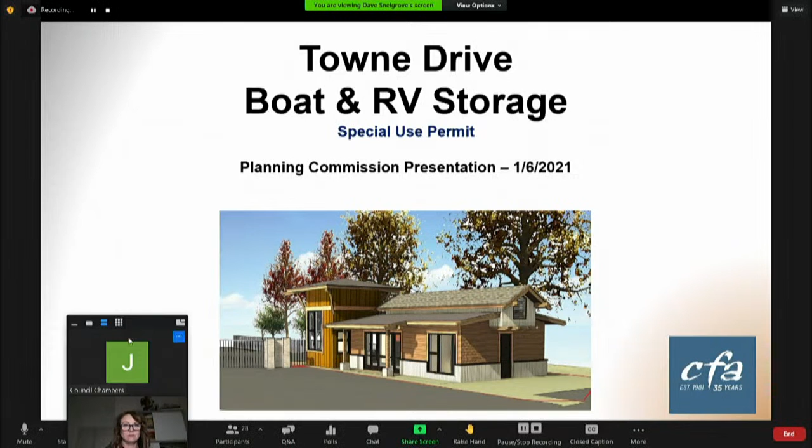Thank you very much. With me on the line tonight, Mr. Phil Busick, who's the project applicant, and Kathleen Knight, who's our civil engineer on the project, should be on as well if we have any questions for her relative to some of the engineering. And let me get over to that screen. Come on, there we go.

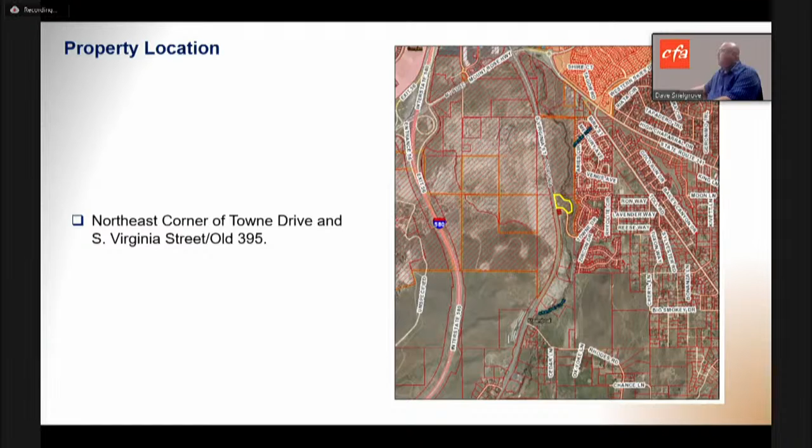So the property location is at the northeast corner of Towne Drive and South Virginia Street, Old 395. We abut the old highway on the western side, and on the eastern side of the site is Steamboat Creek. The existing site conditions, the site's relatively flat, with a gentle grade that goes down towards Steamboat Creek the farther east you go.

On the site, there's an existing billboard. That billboard is conditioned and required to be removed with the construction of the project. We also have an H-frame power line, an NV Energy power line, that cuts across the bottom part of the property, running from northwest to southeast.

We have been in conversation with Chris Robinson over at NV Energy relative to the transmission use agreement, which will have to be done prior to us constructing and actually operating this. These line heights are really high, in the order of 45 to 55 feet, so we shouldn't have any conflict with power lines. We just have to get the appropriate easement and agreement set up to construct and then to operate below those.

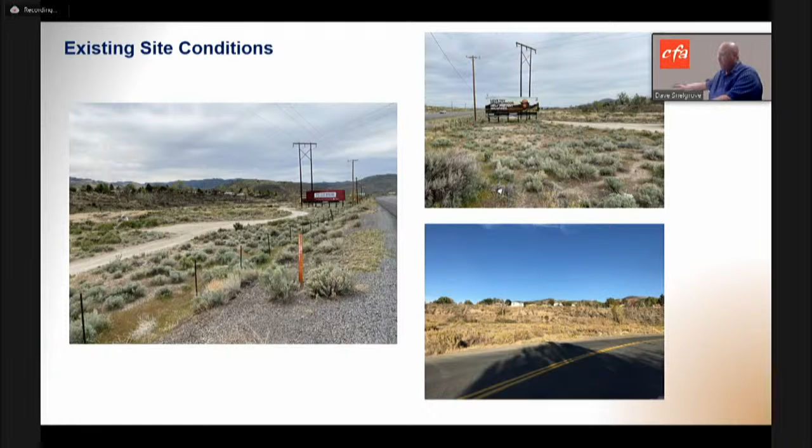This is the site over time, and Phil's owned it for a couple of years now. It's been used off and on as a dumping ground. The picture on the left and the picture on the bottom of the screen are two that I found just recently that hadn't been out there before. I put this picture in on the top right-hand corner.

This pile of rocks had to be put there by Phil as a blockade. There's a gravel area just south of our site that Phil also owns. Somebody had dropped a dilapidated motorhome there, and it became Phil's problem. At about $2,500 later to get that removed, and a code enforcement issue on him, he got wise and said, okay, I got to put something up to keep people from using this property as their dumping ground. That was right adjacent to Towne Drive. I believe the residents were upset about that. Phil ultimately got it taken care of, but yeah, that became a code enforcement issue.

So with development, some of this goes away just because you have eyes, and in our case, we'll have video cameras and things like that on the site.

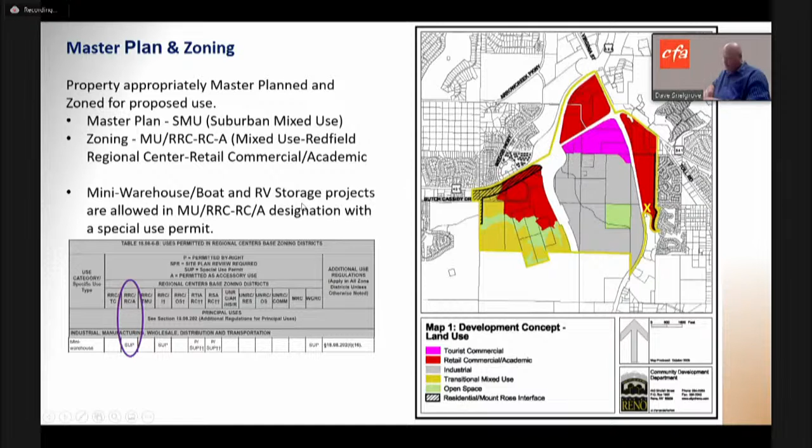So we only have them to the north of that power line. There would be one building on the site, down here toward the southeastern corner of the site. That would be the manager's office. It will also hold a bathroom accessible from the interior of this gated area, so for the renters, there will be a bathroom facility they can utilize when they pull up and drop their boat or RV off and need to use a restroom. That facility is here. Manager's office will obviously have its own restroom inside, and we have our parking out in front, with pull-up space for larger vehicles as well.

The reason for that: the floodway area is off over here on the far right-hand side of the property, and we've got some of the AE zoned property too that we're not developing. So we're staying out of that more flood-prone, marshy area, which one of the comments in a petition that was submitted talked about. So I want to point that out.

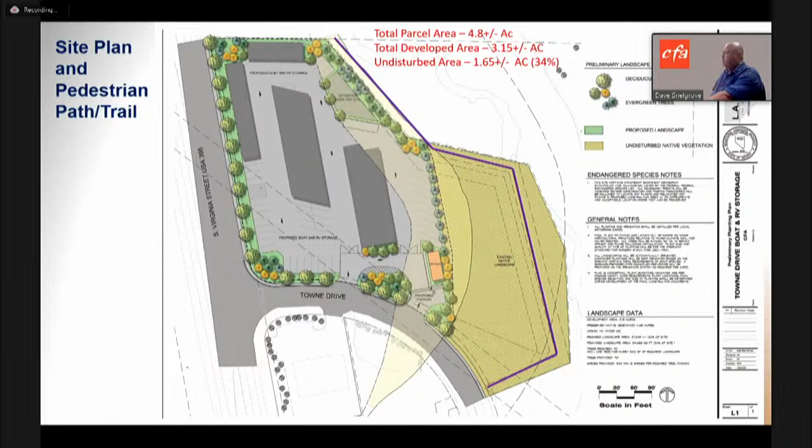There will be sidewalk and pedestrian paths along the frontage to Towne Drive, required as part of code, and also shown on this Redfield Regional Center Plan and along South Virginia Street, starting to create some pedestrian connectivity up and down that corridor, which was the former highway.

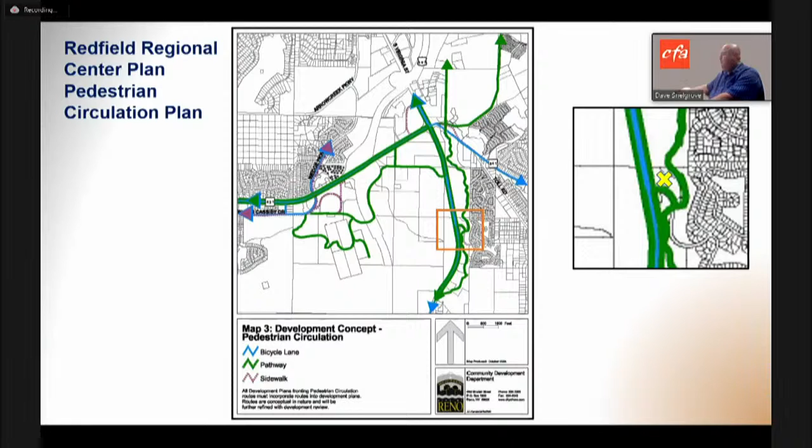We do have the NV Energy power line that runs through the site, shown here in yellow. That's an area where we can't put canopies. We can park under it, but having canopies and built structures there, we wouldn't be allowed to have. It's a very rare occasion that NV Energy allows that.

There had been some questions and concerns in the petition and some of the other letters relative to the location of the dump station. We've got a reasonable distance to the creek. However, if it's felt this may be better somewhere else, we can look at relocating it. We would like to keep it in because we feel it's a helpful amenity in a facility like this—if people are coming back from a trip, they're able to do their dumping of tanks, and this would connect in with the sewer line. So it's not like we've got a septic tank on site that could be affected if flooding happened; the sewer lines are right next door to this.

We can work with staff, and this is actually required to be approved by NDEP and the Washoe County Health Department through conditions, so this will be looked at quite a bit. We'll make sure that it's in a safe location, and if it needs to be moved, we can relocate it to another place.

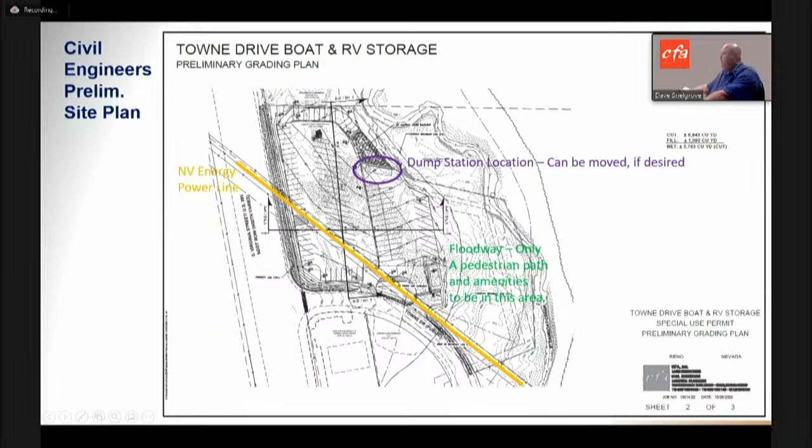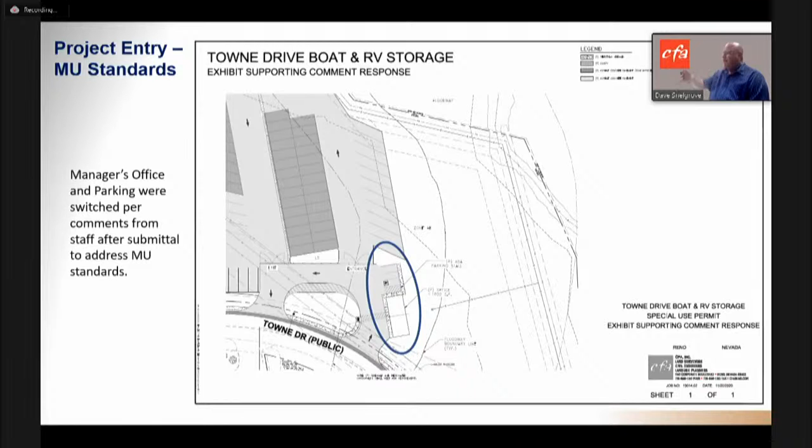One of the changes we made from the other site plans I showed you—when we initially submitted this, we had the parking out closer to the street and the building was back. It worked out very well with our bathroom and access into the gate, so we'll have gating. Our parking is going to be to the north of the building, and the building will be closer to Towne Drive. That is per a mixed-use requirement development standard. So we made that change, and that came out of our initial comments from staff.

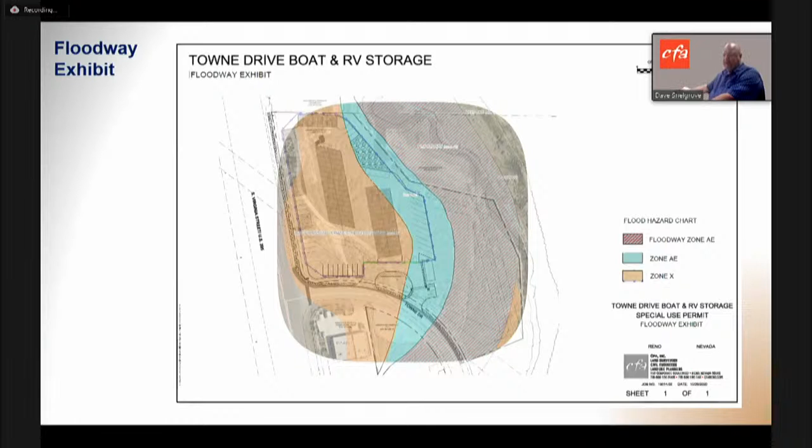The thing about boat and RV storage is it actually works very well in these flood-prone areas, because other than the actual manager's office—which we needed to set farther back to get separation from the intersection—that's the only building we'll have on the site. Everything else could be relocated, moved, may or may not need to be moved on the site or off the site, depending upon flooding. So the flexibility of the site relative to a flooding environment is actually very conducive.

The architecture of the site—Dale Cox prepared this, and I think it turned out wonderfully. The manager's office has a very nice appearance. We will have landscaping around the perimeter and a security wall around. I'll go through other parts of this.

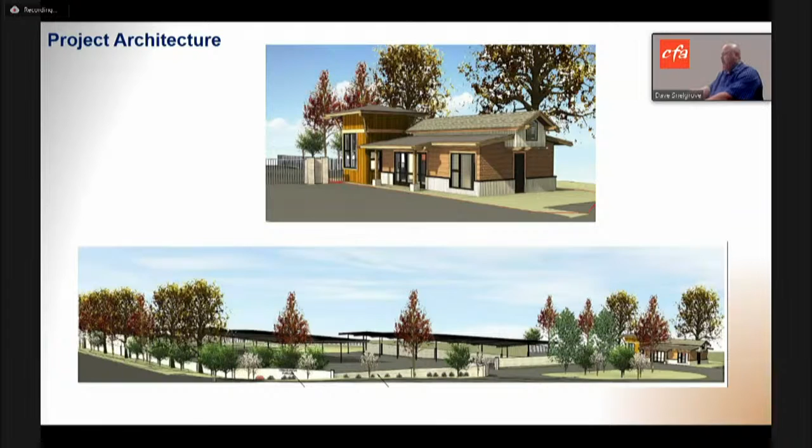The canopies will be seen where we have canopies up against South Virginia Street. They're going to incorporate what's called a curtain wall that'll come down. It basically will help screen off the backs of any of the boats and RVs that are up there closer to Virginia Street, which is where we have it. I think we have one on the northern side of the site too, that'll have the same treatment.

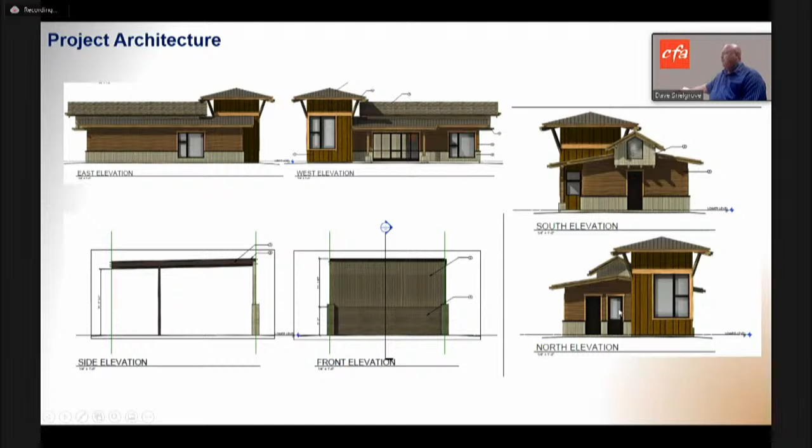You can see that the manager's building has four-sided architecture. It wasn't just treated on the front or what's highly visible—it'll have a good appearance from the eastern side where the residents are as well.

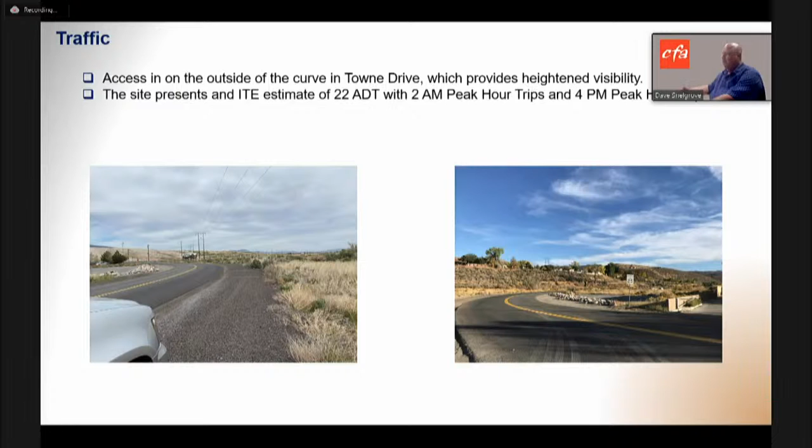When we ran this through the ITE website or their software, the number of units that we'd have, or storage units, came up to 22 average daily trips, which is very low. That's about the equivalent of 2+ houses, 2 AM peak trips and 4 PM peak hour trips. So those are all very low and don't come close to breaking the threshold of a necessity for any type of traffic report. It's one of the lower intensity uses that you're going to find relative to traffic.

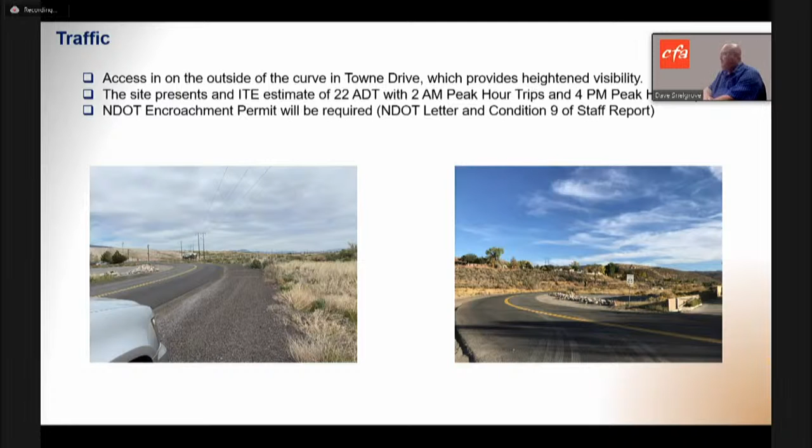An NDOT encroachment permit will be required as part of this. There were some concerns and questions about the intersection of Towne Drive and South Virginia. That's actually controlled by NDOT, and we will have to go through their process, get any encroachment permits, and live by their rules and regulations. That is conditioned as condition number 9 in your staff report.

We did a biological study and a cultural resource inventory of the site. Both of those documents end up being relatively confidential because of what they show—SHPO and NDF are involved and they know where things are.

They did find a couple things on the biological study—a couple small populations of steamboat buckwheat on the site. Our thought and goal, and we'll have to get this all proven out and have NDF accept it, is to relocate those to another piece of property that Phil Busick owns. He owns about 155 acres to the south as well, and we'd relocate those down where there's another population. That'll all have to be proven out. The person we're working with, Nancy Santos, believes that will probably be acceptable, but we will have to run that through the process.

The cultural resource inventory found that the power poles were old enough, but they were not eligible for the National Register of Historic Places. Also, and this one was a little disheartening, they had one archaeological find—one crushed aluminum can with a pull top. This was a little disheartening because I remember using those. That also was not eligible to go on to the National Register of Historic Places.

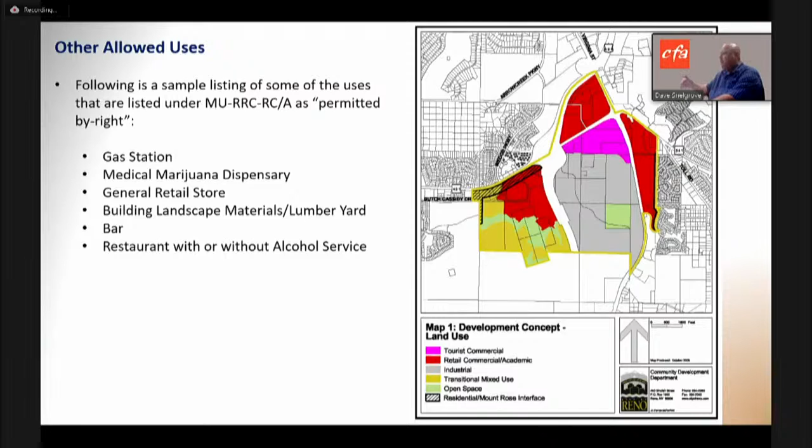Comments from the neighborhood—looking through the petition, I tried to pull each one out that I could find and give a response or some kind of recognition of it. One was about the dump station being close to the creek. I mentioned that earlier, that it potentially could be moved or removed. I don't think that would be desirable or helpful with the use. I'd prefer to keep it in, but that's something that has a certain degree of flexibility if that does become a concern to the health department or the Nevada Division of Environmental Protection.

There's also the historically significant area—there's going to be a trail along this that respects the creek and some of that history. In learning about this property over the past couple of years with Mr. Busick, we found out about a lot of the history with the V&T Railroad line going through this area, and through our cultural resource inventory, finding about some of the Indian tribes. Mr. Busick is actually very excited about some of that history, because among the other things along the creek, there's a requirement for a trail, and he sees that as being really a big positive in association with the property. So we greet that with open arms as far as the historical significance of the area, and we want to be respectful of that.

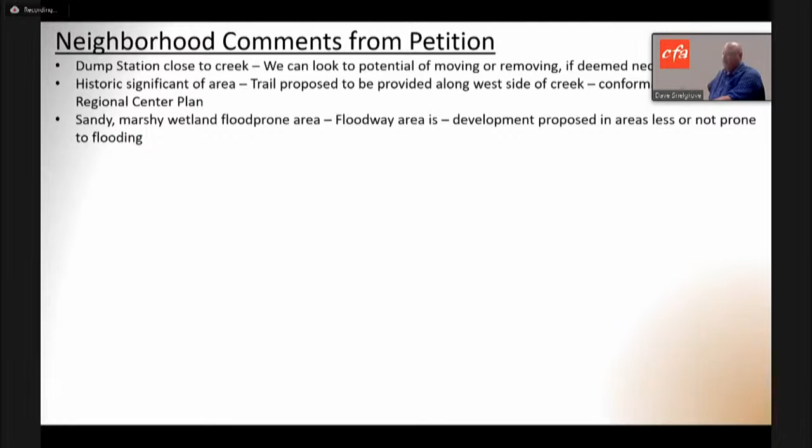Sandy marshy wetland flood prone areas, we're staying out of the floodway area, which is where that primarily exists. As you go up the hill a little farther, it's dry and a little more silty, sandy, and that's the area we're looking to develop. Migratory birds, no development in the floodway. That's where your primary bird habitat's going to be, where any riparian vegetation and trees are.

Sorry to interrupt you, but we need to wrap this up as soon as possible. Did I already go through 15 minutes? Holy smokes, okay, I appreciate that. I will wrap up very, very quickly.

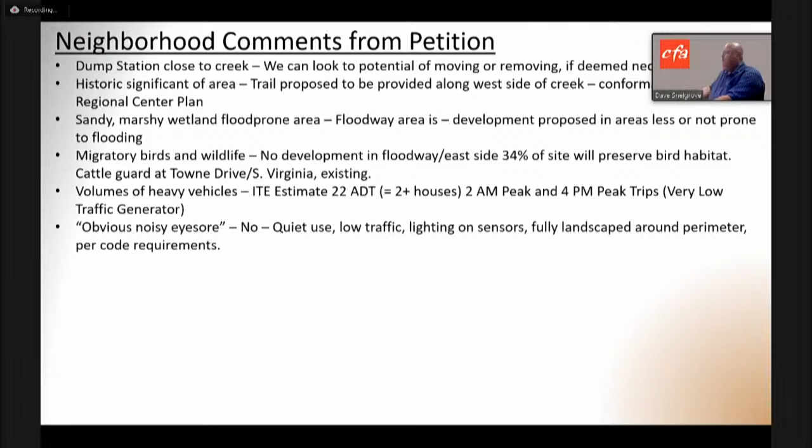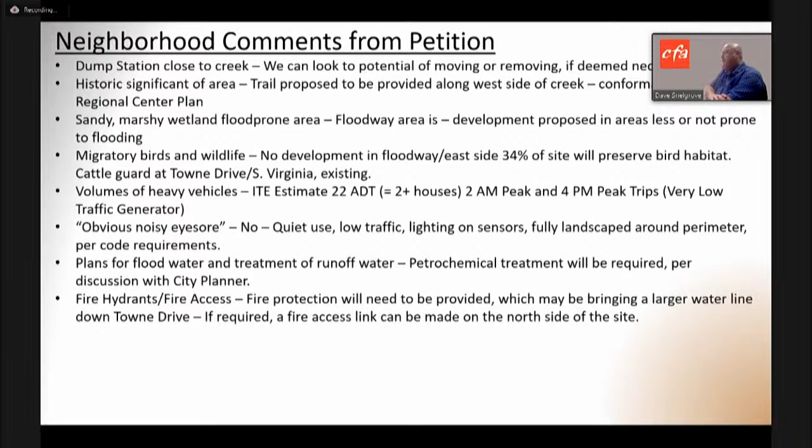We already covered traffic. This is a quiet and low traffic generating use. The lights in this will be on sensors, so most of the time the lights will be off. If nobody's in there at night, the lights will be off, with the exception of any security lights up around the front or the entry, which is what we're anticipating. Plans for water, we're going to obviously have to have fire hydrants and things like that, or some suitable alternative. And we have been in conversation with the fire department.

So I'll close. We agree with the staff's recommendation, and we're in agreement with the conditions as presented. If you have any questions for myself, Phil Busick, or our engineer, we are available to answer those. I appreciate your time, thank you very much.

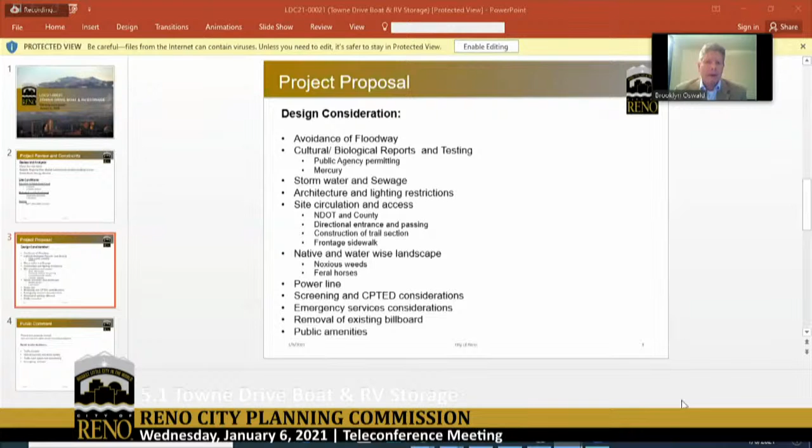As we look at RV storage or mini storage, they are what we consider a low impact use. Traffic is very low, you usually don't have other sites highlighting or some of those other items that we'd be concerned about. We're also using the Public Works Design Manual to review this.

And as you went through many of those conditions, you can see there are many outside agencies because of the sensitivity of this site and some of the environmental concerns. So we have NDEP, we'll have Department of Agriculture, potentially SHPO, potentially our Division of State Lands and others on that. I have reached out to some of those state agencies and have run these conditions, verifying with them that it helps cover their permitting and their permitting process. And they are in agreement with how we put these conditions together.

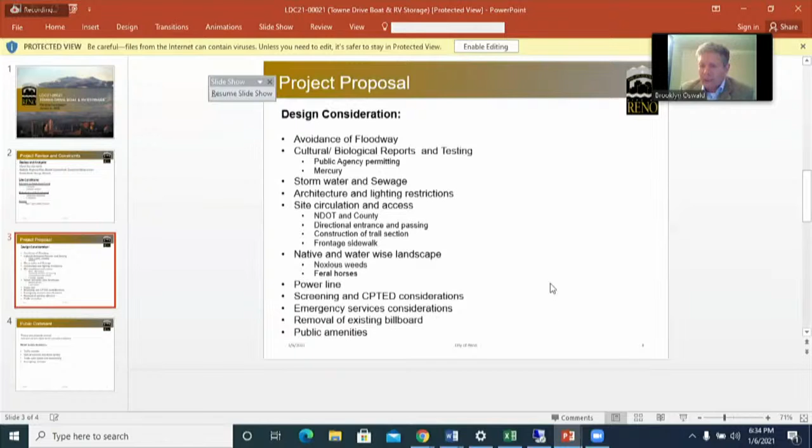And then through that MU requirement, we have public amenities. Dave mentioned that a little bit. That is a project cost, or in our new code, it's a percentage. We're obviously encouraging that history and some of those other things on site, both environmentally to get that education over to the public, and through interpretive signage or other means or artwork.

Public comment on this, the project was properly noticed. Because of COVID, we do have restrictions on both our NABs and our CABs, so it does restrict our ability to get that information out to the community in an earlier fashion and some of these things.

The notice public concerns that I pulled through, we have those traffic impacts, the natural systems and water quality, the trails, open space connectivity, and those emergency services.

As outlined in the staff report and as those conditions sort of show, those are very similar concerns that staff had, and staff worked with the applicant very hard to craft conditions that help to mitigate those potential impacts. So with that, staff can make all the findings with what has been presented by the applicant and with the conditions as written, and does recommend approval of the project. I am available for questions as necessary.

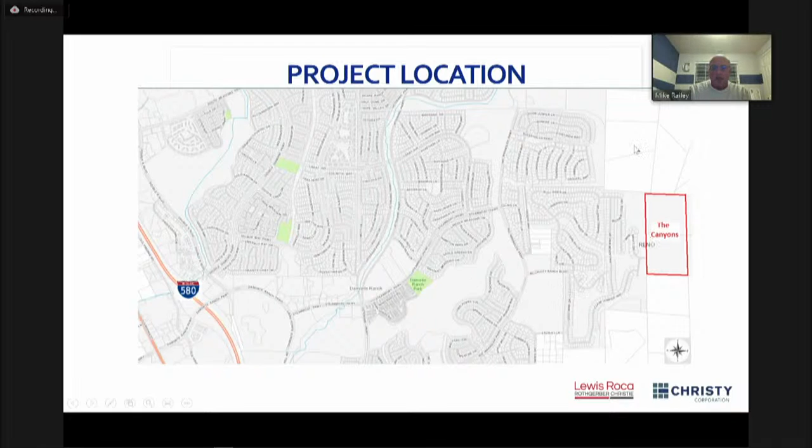For those not familiar with the project site, it's located directly east of the Palisades subdivision, currently being developed by Lennar, at the base of the Virginia Range. This gives you an overview with the high school down below. The existing conditions show tremendous views and quite a bit of flat meadow areas once you get up on the site. These are some pictures showing the existing on-site conditions.

This project has some history. It was originally proposed as a tentative map with a more typical suburban approach to development. That had some concerns raised with staff, and the project was essentially withdrawn. When we were first brought the project, we met with city staff and the community development director, and it was suggested that given this is a unique site that sets the stage for future projects in the area, a PUD approach would be a good way to create and set the standard for what goes on in the Virginia Range. So that's where we got with the PUD approach.

It is a total of 71 units. The handbook does allow for a mix of single family options. So if you look at the land plan, we have the typical suburban lots, semi-custom lots, custom home lots, and even some duet lots on the map, which appeals to a wide range of the population and a broader demographic.

The PUD also creates a unique desert contemporary theme that will be carried forward. It really sets the project apart from what you typically see within Damonte Ranch. The PUD also mandates some site adaptive architecture, including walkout basements and step foundations. In fact, the grading on this plan compared to the previous project is reduced by up to 70%, a tremendous difference in the amount of disturbance on site.

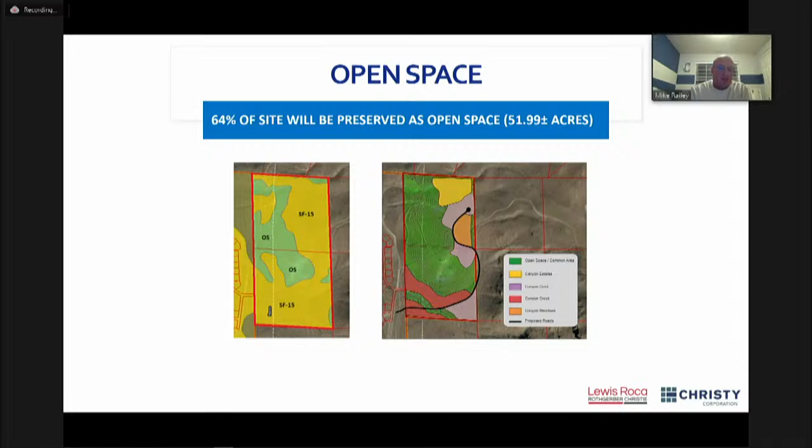Just a comparison with the zoning, as you can see, the current zoning versus the PUD we're requesting is a mix of SF15 and open space. If you compare the green area on the left, which is the current zoning, with the green area on the right, you'll see that far more open space is preserved with the PUD plan. It's actually about 64% of the site, just under 52 acres preserved as open space. It reads better in the PowerPoint. I broke the plan into 3 parts.

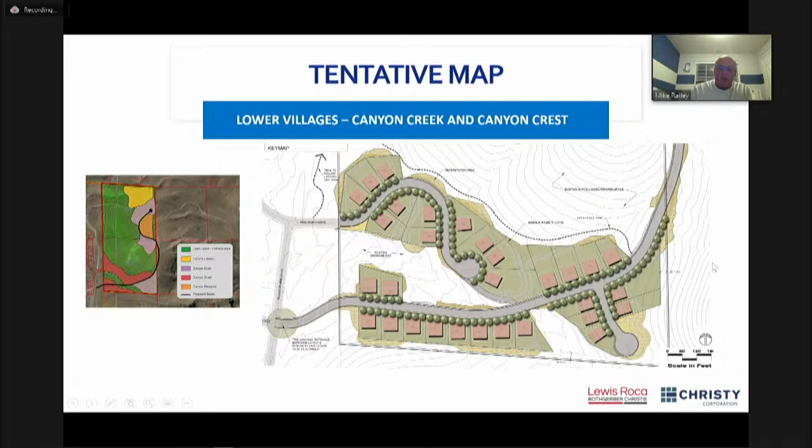This is what we were calling the lower portion, the lower villages, Canyon Creek and Canyon Crest, as you come in from Mineshaft Drive and Claim Jumper Way. Mineshaft Drive will be extended into the site as a cul-de-sac with only 11 lots, and then Claim Jumper Way will be extended as the primary access up through the project. So those are the lower homes. And here you can see the knoll being preserved. These lots include walkout basements, as do these duet lots, which will be entirely screened by the existing knoll.

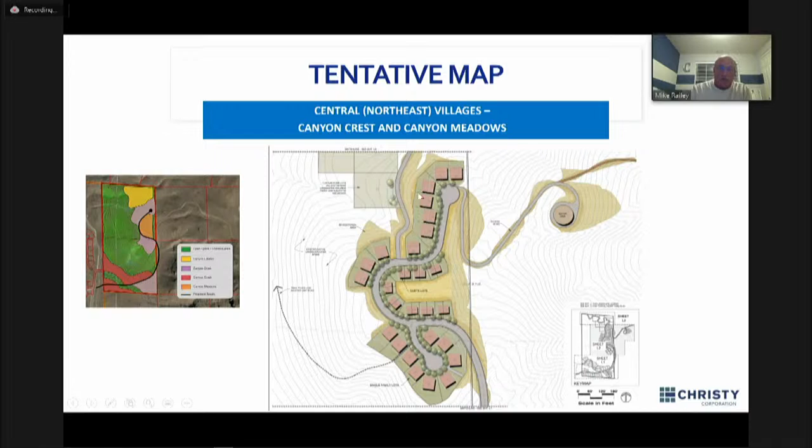And then it moves up to the north. These are all walkout basements. Moving up to the north, you have our custom lots that are served by this private roadway, which will actually extend into the adjoining property for a future secondary access for that project.

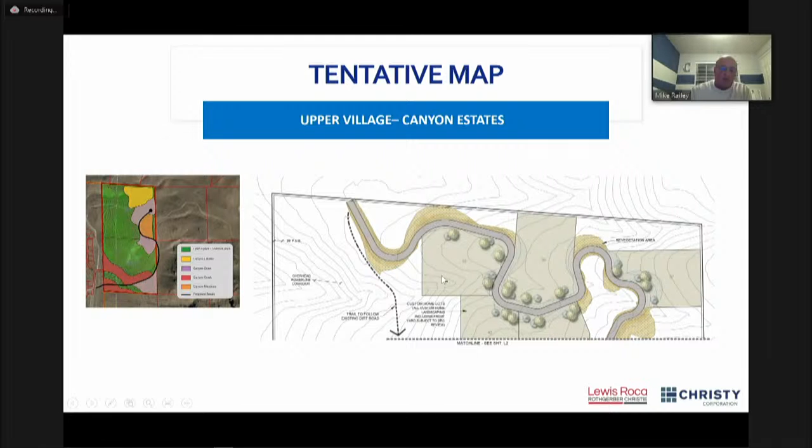This road does extend outside of the project boundary. However, that is within an existing easement, and the adjoining property owner has provided affidavits showing his concurrence with that.

One other thing I'll get to about the trails, but the PUD approach I think is significant because it ensures really strict grading standards and helps protect those natural features on site. That was a big concern of staff and the community with the last map. We've changed dramatically to reduce the amount of on-site disturbance and how we go about developing the site, working the project into the site rather than working the site into the project.

We also have some stringent architectural design guidelines. The applicant really wants to promote the use of native materials and vegetation. If you've been out there, you'll see that it's very rocky. Incorporating that natural stone into the architecture and into the community amenities is a key feature throughout the PUD.

We do protect wild horses by adopting the identical standards that were included within Daybreak. We also require a contribution to the city's affordable housing program with every unit that's built.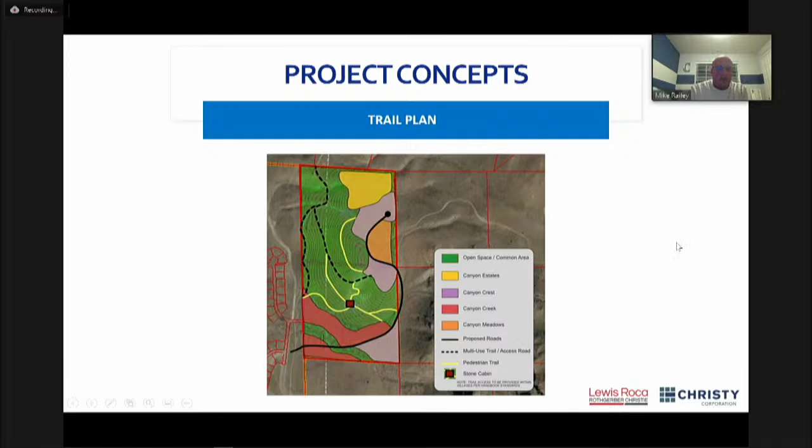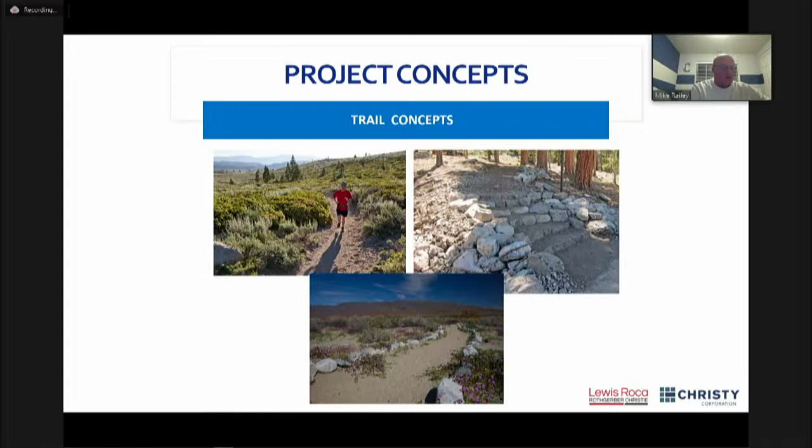As I mentioned before, the theme is to keep things natural. We do not plan to pave the trails, rather keep them in a more natural format and frame them with some of the natural materials found on site.

One thing we are looking at doing is creating, with the stone that's on site, a little stone cabin that would be within the open space and within the trail network, providing a community gathering area. Perhaps, in the summertime, community socials, that sort of thing.

The open space also allows for a bicycle pump track, some community gardens, even vineyards. These give some examples of the use of stone to create various amenities such as benches and so on along that trail system.

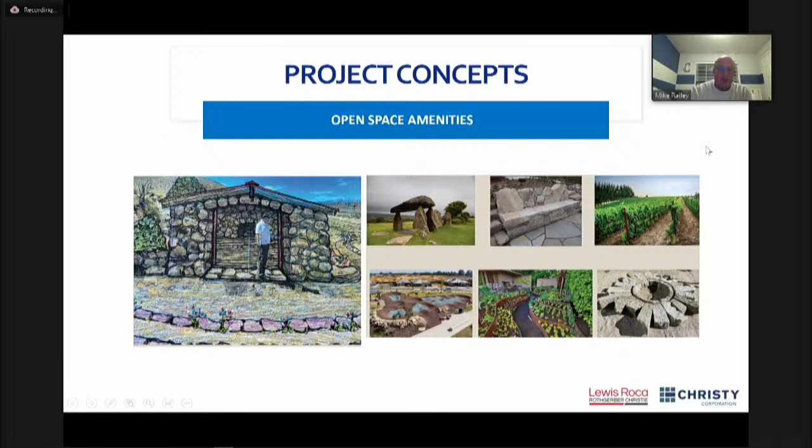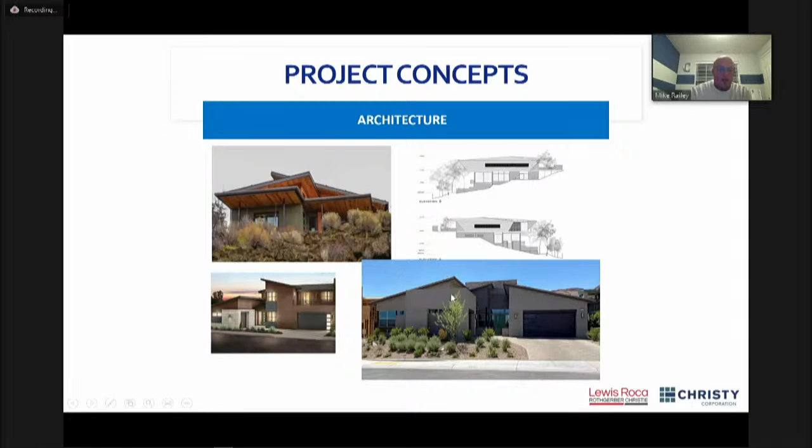This is just some quick concepts of the architecture, the use of native materials. One concept the handbook requires is the use of that natural stone, creating, for example, trail markers by including the stone within those rock cages, as they're called, using stone to highlight the trail system.

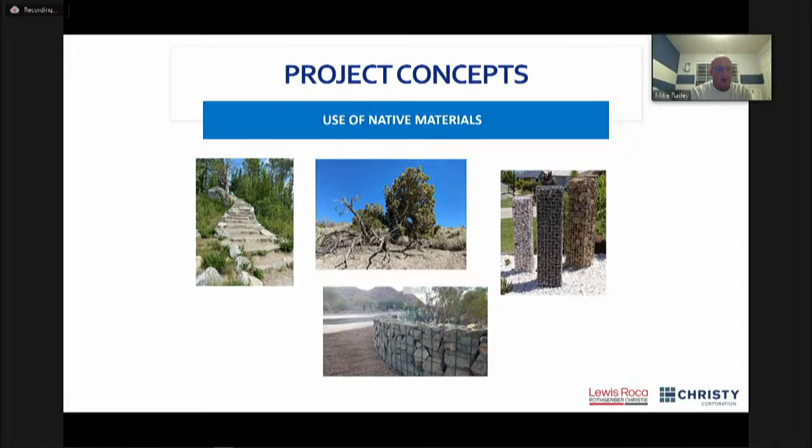There is some mature vegetation on site in terms of pinyon pines. We're actually looking at relocating some of those within the open space, strategically locating them near benches and that sort of thing, to really create more of a natural feel on site than what most projects would have.

We have adopted urban wildland interface standards within the handbook that exceed standard code. Although the project is within an acceptable response time of the Damonte Ranch Fire Station, we also have a condition on the project to include fire sprinklers in the homes. New development that abuts open space or common area will have 30 feet of defensible space with an additional 100-foot buffer zone per the fire department standards.

On top of that, the HOA is to maintain an additional 20-foot buffer above and beyond the standard buffer. So not only does that exceed fire department standards, but it actually enhances the fire department's ability to access the wildland areas to the north and south over what exists today.

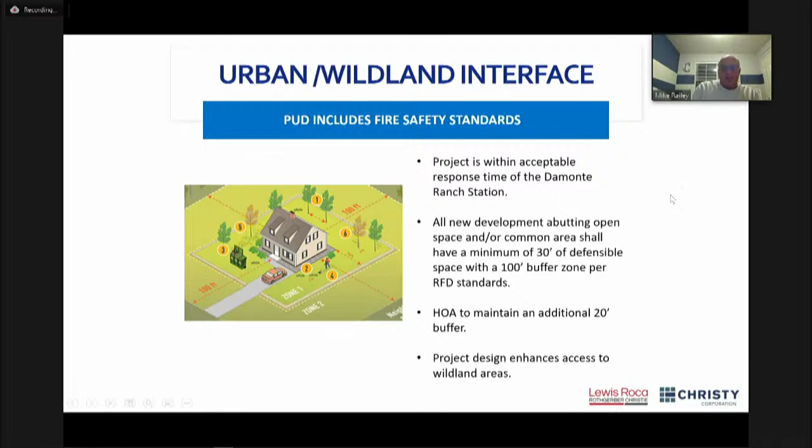Mr. Dolan has worked closely with the horse advocates for quite a while now. As I mentioned earlier, we did adopt the Daybreak standards. However, at the request of the wild horse advocates, we are volunteering this additional condition. We've run this by Brooke, and it will be added into our handbook.

In addition to the Daybreak language, we would like to add that during developer's construction, the developer will require its contractor to provide a gate monitor for roadway crossings, with an emphasis on monitoring areas on the property with potential egress to existing improved areas. In other words, while construction is going on, there'll be a monitor on those gates so we can ensure full compliance with the standards in the handbook.

In wrapping up, Garrett and I are both available to answer any questions you might have. We are in concurrence with the staff report and all of the conditions as presented, with that additional horse condition, and we're happy to answer any questions you might have.

Great, thank you, Mike. Brooke, is it you again? We can't hear you, Brooke. Brooke, you're on mute, apologize.

Yes, it's my show tonight. Brooke Oswald, Associate Planner for the record. I'll pull up - I've got a brief presentation and we'll move on from there.

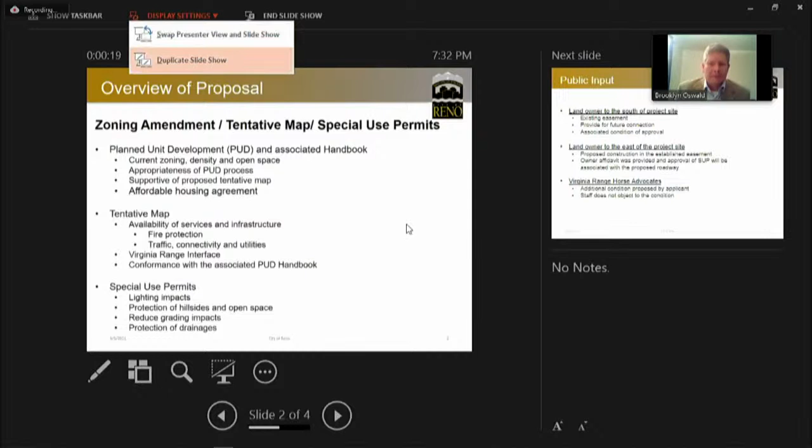Just to verify that you can see my screen. Yes? Okay. This is the canyons, this did come in. We can see your screen, but not the presentation. Yeah, not the presentation, it's on the wrong screen if you're using two screens. Yep, desktop. All right, did that help? Yes, okay. Just to go an overview of the proposal because there are many moving parts - hey Brooke, let me pause you for a sec. Just one thing, can you go up to display settings at the very top and then click the drop down arrow and go to duplicate. Yep, that one, that one. Good, perfect, thank you, all right.

I just want to briefly go over the proposal. This is a little unique because oftentimes we'll see a master plan amendment and a PUD, with an associated tentative map, and we're doing the special use permit, so we are bundling those all in one review. There are some intricacies to that I'll go through as we move through.

The first one we're looking at is that zoning map amendment, that's to that planned unit development, and what comes with that is the associated handbook. That handbook sets standards and requirements kind of outside of code or above code. As demonstrated very well by Mike, the current zoning is SF15 and open space, and comparing the density and open space with the new project - from our current zoning with this new zoning, we're seeing the advantages of housing being closer, the development being closer and clustered a bit more, and additional open space being provided.

Really when we look at the appropriateness of the PUD process, we want to look at why we want to run this through a PUD. As Mike went through, there's additional architectural standards they'd like to maintain. This is a sensitive site as we're approaching some steeper slopes, looking at hillsides, gradings, notable features like that knoll Mike mentioned. Additionally we have some drainages, other biological concerns, and the Virginia range concerns. So having a handbook that gives direction and guidance to all of those is really helpful and appropriate in this case, and this also helps support the tentative map as we move through.

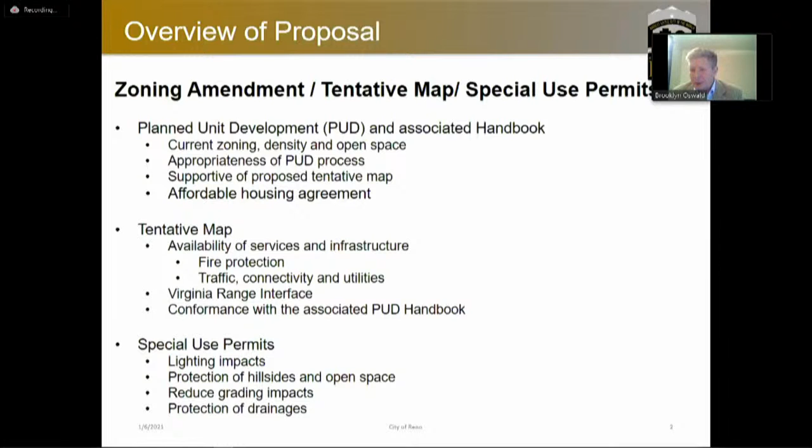We see the development really congregated into areas, and a mix of product types with a denser product type, which reduces overall grading. We're seeing creative methods through hillside-adaptable architecture and larger lots that will protect that land in other ways. The last item is protection of drainage ways, making sure we're maintaining those natural systems and they're functioning properly.

We have had public input. There were three or four more comments that came in just prior to the meeting. I have not been able to include those in the slide, but they were forwarded to the Planning Commission. A number of those dealt with issues we've tried to address through the handbook and the tentative map, as well as traffic and other natural systems impacts.

We also had a discussion with the landowner to the south of this project, another large owner with another large parcel. On many of these large 40-acre parcels up there, there's a shared common access agreement that runs up the boundary line on both sides. He had concerns that grading could impact his potential to build that access in the future. We had a lengthy discussion, and there's ability to let go of that easement and establish an easement elsewhere. So we have a condition that maintains the easement as it is, but also allows possible connections to this site further up, coming off the cul-de-sac, so that from a city point of view we're providing overall connectivity across that hillside.

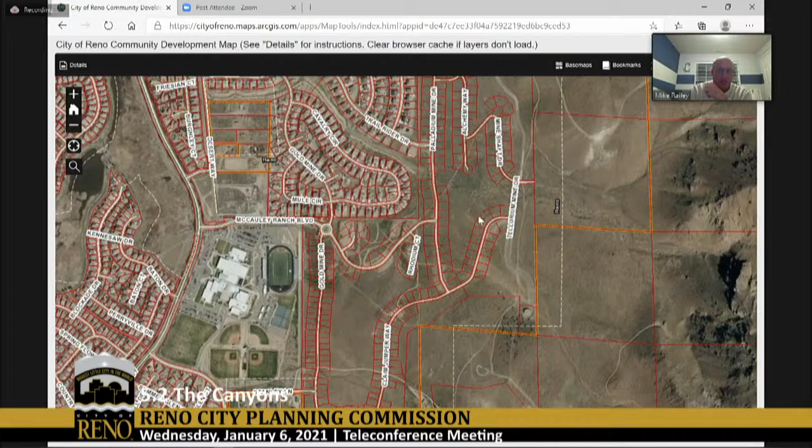Sure, and I'm going to go back to the share screen - I think it'd be a little bit easier to see. We were confused by that comment as well, to be honest with you. I spoke with Mr. Dolan. I believe the previous project, which I was not involved in, had a connection that came down to where most of the traffic came down to Trail Rider Drive. Mr. Dolan had agreed prior to move the accesses down to where they are. I think there was some confusion that somehow that access had changed, but the access is in the same place that was proposed with the previous map as was discussed with the neighbors. So I don't know if some wires got crossed there, but it's my understanding that where the access is being proposed is exactly where they were hoping it was going to be.

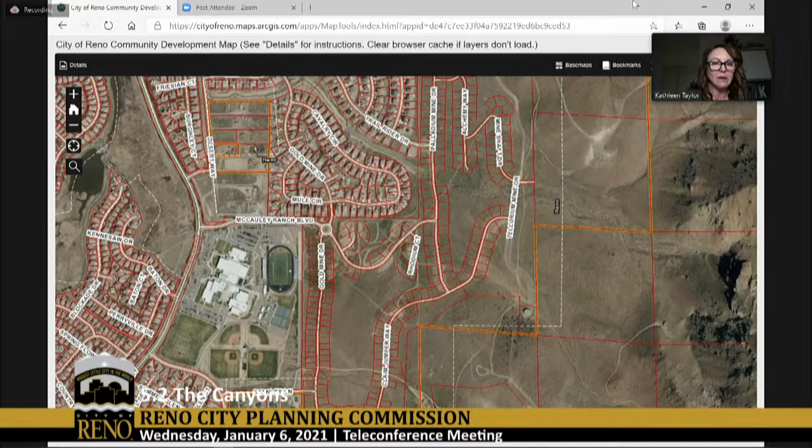Okay, thank you. And then my next question was actually within the PUD, the amphitheater. Have the neighbors heard about the amphitheater or had a chance to comment on that? And the reason why I ask is because on, I think, another project a while back in that area, the amphitheater was not positively received, and I'm not sure if it was in scale or in the same size.

This would be a very small amphitheater. It wouldn't be somewhere where you'd have major concerts or anything like that. We have some pretty strict regulations in the handbook in terms of hours and amplified music and that sort of stuff. It's more of a, if you're going to have a community type event - it's very small, wouldn't accommodate large crowds or be conducive to people driving there. It's really more of just a community amenity rather than something where you'd have people from all over the region coming to.

Okay. Commissioner Johnson, did you have some other questions you wanted to get into?

Thank you, Commissioner Taylor. I had a couple of questions, and maybe they're more comments for the applicant - in reviewing part of the presentation that both Mike and Brooke mentioned was the architecture that they were looking to do up there, and there's a number of items in the PUD responding to that, which I can appreciate, but I have some concerns. There seems to be some pretty heavy emphasis on both the design review committee to review everything and some desire to have the architecture be a desert modernist with some references to Palm Springs and some images that are not from our area. I guess I would just throw out there - I was trying to tie this to a finding or a comment or anything else, but I think there's some weakness in terms of what's defined.

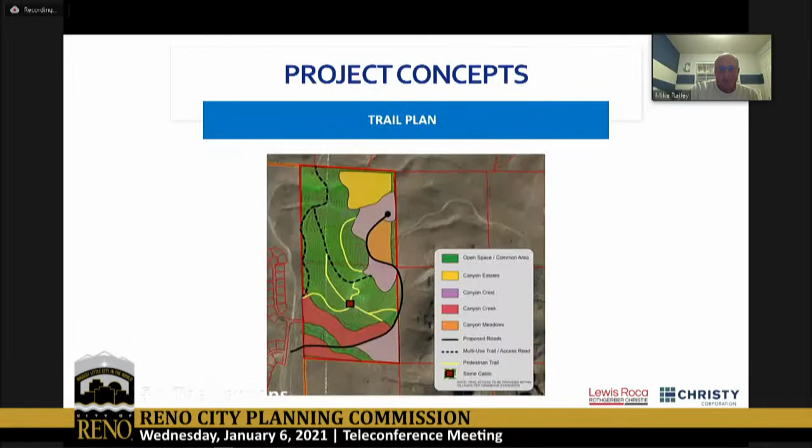Yes, yeah, yes and no. Let me get back to the appropriate slide, it'll be easier to see. So there are two access points coming in - there's a connection between these two cul-de-sacs that provides an access loop, and when you get up to the custom homes, this road here will act as a secondary access connecting into a future project. This is an existing power line easement that could connect as well with an all-weather surface. The fire department is requiring this road - we designed it exactly to their request - that it be extended up as you see it here, which will provide the secondary access in the future.

If this property were to be developed, as Brooke mentioned in his presentation, rather than this being a cul-de-sac, we would grant an easement to allow an extension of that road as well. So when everything is built out, there'd be quite a bit of connectivity.

So secondary access is contingent on the approval of development further to the east? The extension of that access, yes, but like I said, we're meeting the fire department's requirements with the design now, and we've also added the sprinkler condition to ensure full compliance with the fire department's requirements.

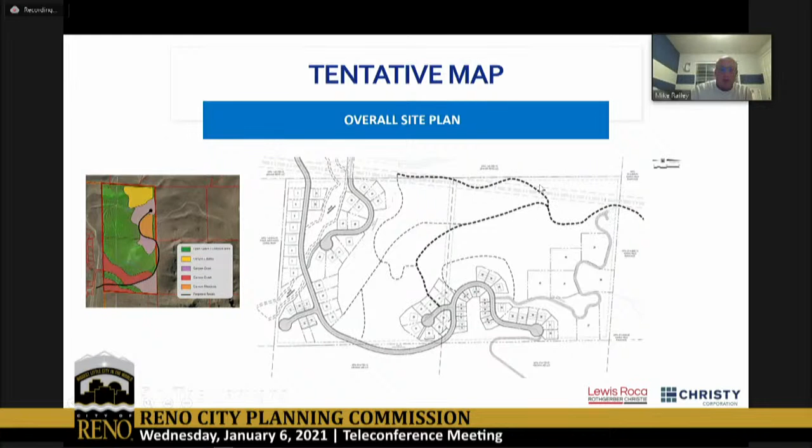I'm sorry, Mike, walk me through again how, if it's just for your project, the secondary access through the custom lots seems like it ends right there. But you could connect this road here. That could be served as a secondary emergency access as well, and that exists today.

So in other words, if you're ready to build out and there's no project to the north, then you would connect to the dirt road? Correct. But we still meet the fire department standard with the sprinklers and whatnot. We're meeting all of their conditions, even if these never connected to anything, we would still meet all the fire department requirements. So in other words, sprinklering satisfies, you don't need a secondary access.

Right, because if you take the distance from this, since you have a secondary connection here, the distance is allowed with sprinklers under the current code. Thank you, that's all I had.

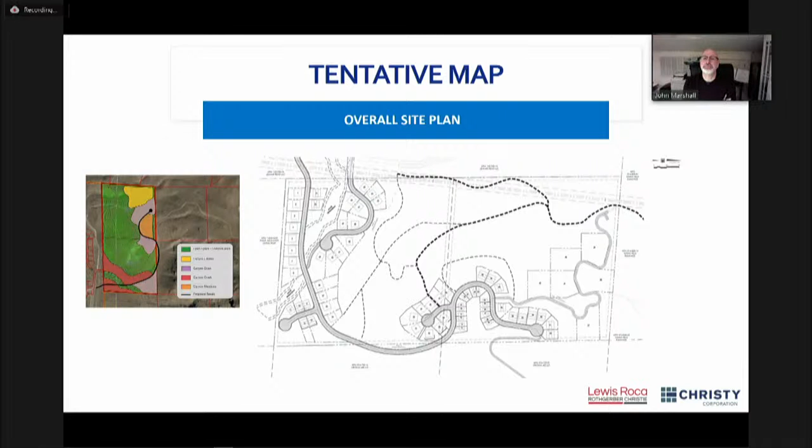Commissioners, other questions? Okay, I don't see any, so I think we can have some discussion. Somebody would like to get us started?

Madam Chair, if I could go back to where we started this agenda item and the point about the PUD, I am a little bit concerned about that. Looking back at the staff report and how this is agendized, it does say Exhibit A is the PUD handbook, and the PUD handbook is not obviously part of the staff report. It wasn't online, and maybe Brooke, you can point me to a link, but I looked through it during the discussion and I couldn't find it. So I'm frankly okay with the project, but I'm a little bit concerned about a procedural issue here.

Yeah, and I can try to pull that up and see how it was agendized. As it goes through MinuteTraq, there's the option with these larger documents that we have been linking for reference so as not to bog that down, and I think that's how that one came through and why it wasn't printed out. We had done that in the past and had those links be successful, and I don't know if it was an error on my part or within the system itself that those links were not available or not working correctly. I would have to look into that a little bit more and see what exactly happened there.